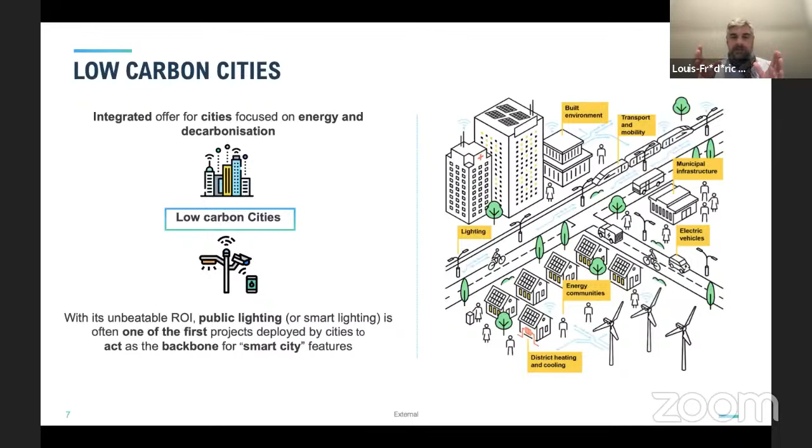But the most important thing is you need to know where you want to go and be ensured that the infrastructure you will mobilize, renew, or develop will be able to handle various services to be offered.

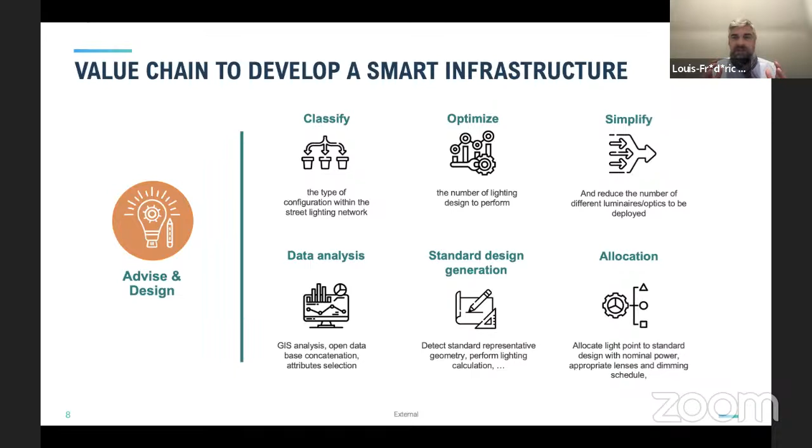To do so, we believe it's important to advise and design, meaning you need to classify, optimize, simulate the impact, simplify, and really take advantage of the data on the ground. We are very active in that area in the regions, about data analysis, making standard design and generation in order to industrialize, scale up, and allocate.

Then using digitalized solutions to build an effective procurement process, mainly under the PPP framework. Definitely, this is the most advanced one, and this is the one that offers the most transparency for municipalities and capabilities. You need to contract properly.

You also have to combine what I mentioned earlier in the discussions: the supply of energy, how to generate on-site generation, how to generate renewable energy on your territory, and embedded flexibility. Flexibility, energy storage, electric or thermal, is definitely key in the future.

The third point is how you engage with your stakeholders, because a municipality is a bundle of various layers of population, citizens, administration. So you need to engage your stakeholders, build environmental plans, and then operate and do the things. You have to monitor the performance with KPIs, digitalize your solutions, and be able to develop new services all the time.

And to be able to do so, you need to have thought before, one step earlier, about this smart and mutualized infrastructure. This is key.

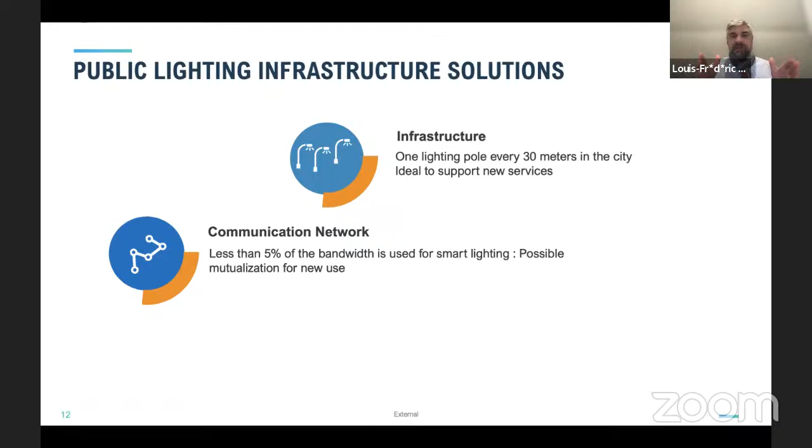And think also that we will have a centralized management system. So rather than having people patrolling everywhere, the system will be smart and will send alerts, and we will just have to respond in a reactive manner if there is a default on the system. This is far more efficient than the previous way we were operating the infrastructure, definitely.

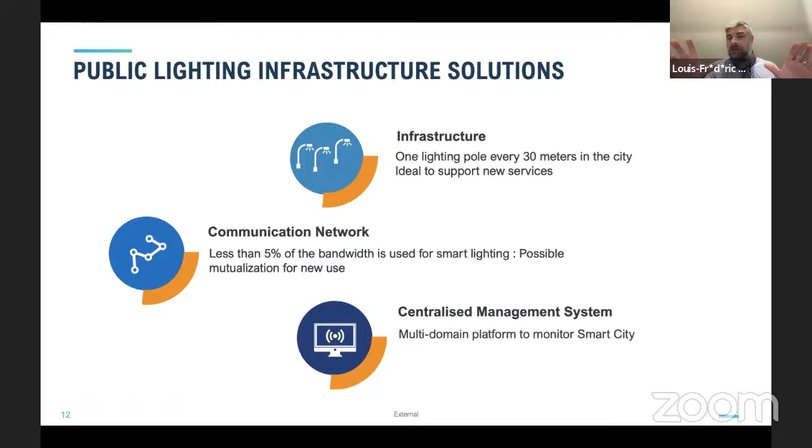With this centralized management system, you will also have the opportunity to overlay many activities on the infrastructure. This is the kind of ideas you can develop on one infrastructure: it could be mobility, security, communications, well-being with air quality sensors, temperature sensors, dust sensors, and of course offering a very good and efficient lighting offer.

If you want to go a bit further, remember we thought it was good to have a renewable power supply, having smart infrastructures in the middle of that. Then you can accelerate the pace to go towards zero carbon cities. You can go a step further and have the appropriate bundle to go in every direction needed to accomplish the vision.

This is definitely where I want to showcase this public-private partnership approach to really boost the energy transition, because what is key now for municipalities is to benefit from expertise, finance, and a long-term perspective. This is where the public-private mechanism is a real good opportunity, because of the capex intensity.

If you want to invest in lighting, energy efficiency, solar panels on buildings, district cooling, mobility, EV chargers, or public transportation - whatever solutions are appropriate to your territory and your municipality's specific needs - you will have to invest a lot of money, and you have to stay on a long-term basis.

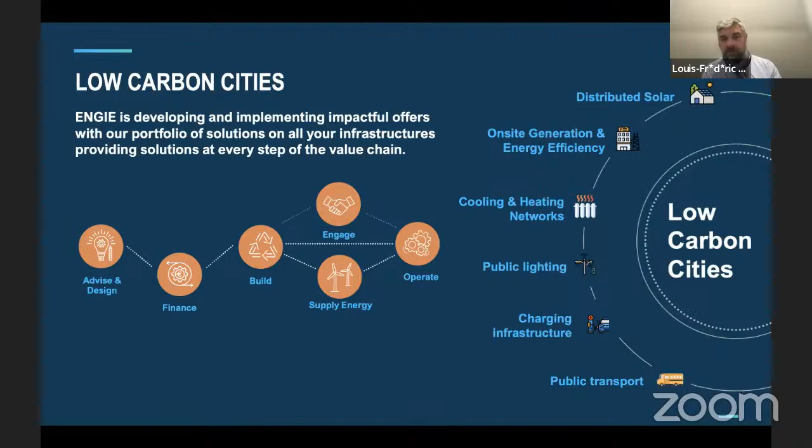We operate at ENGIE in all this area, from public transportation, charging infrastructure, public lighting, cooling or heating networks. We are the first cooling operator worldwide, especially with Tabreed, on-site generation and energy efficiency, and distributed solar. You can see that we are present all along the value chain. We can accompany our customers all along the value chain because we are ready to sustain and take the commitment on performance.

Here's some case studies. Milpitas in the United States - this is a 10-year smart city program for energy and water savings. Within that contract, we have installed 200 kilowatt solar PV, quite small, 5,000 smart meters for water and leak detection, 6,000 street lights, and we have invested money - 1.5 million dollars are saved for the municipality. On the lifetime saving, this is 50 million in energy savings and operation and maintenance savings. So this is quite huge for a municipality.

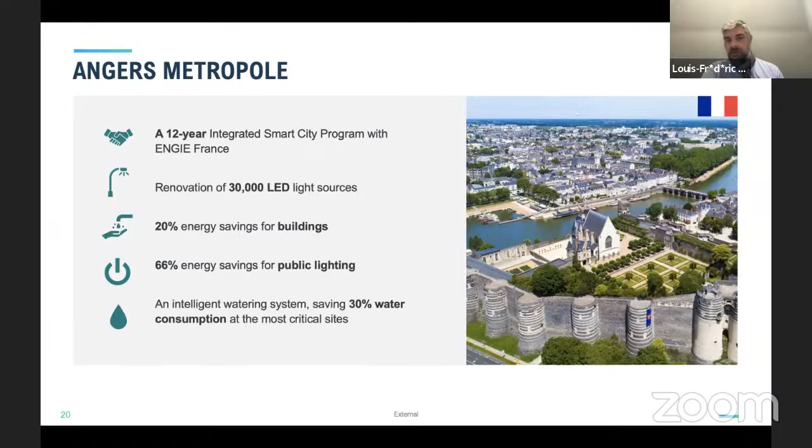Angers Métropole in France - this is the second smart city contract in France, the biggest one. It's a 12-year contract where we will develop smart lighting, smart savings in buildings, smart water systems, and energy efficiency in all the public buildings. So this is really, really key. They also have safety integrations, and on top of that there will be a digital twin and a digital hypervision solution that will benefit the municipality's team to really oversee all the activities in the municipality.

Santa Barbara Unified School District - this is a 10-year contract with solar. We have embedded energy storage. We have also embedded a 28-year PPA, the power purchase agreement, with performance guaranteed. So we see that we can take that commitment.

If we can finish in one minute - yes, I'm finished. I have plenty of examples just to showcase how we bundled various solutions depending on what are needed on the territories.

Ohio State University - this is a 50-year contract with solar, with battery storage, with smart meters. We have also embedded lighting, geothermal energy, and biomass.

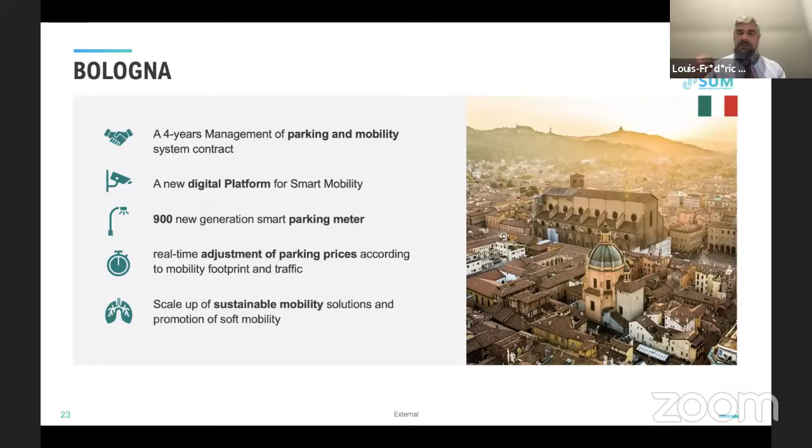In Bologna, this is about parking and mobility contract. So we are able to manage the price of the parking slots to adjust in real time how many people we want to come into the pure town center. In Niteroi, it's about safety and so on.

So thank you for your attention. What I want to resume in a nutshell is that you need to think about how to mobilize at maximum your renewable potential, think about smart infrastructures in the middle, mutualize on them, develop new services, and finally find under the PPP model the most appropriate bundle of solutions you need to deploy on your territory to go to a sustainable city. Thank you.

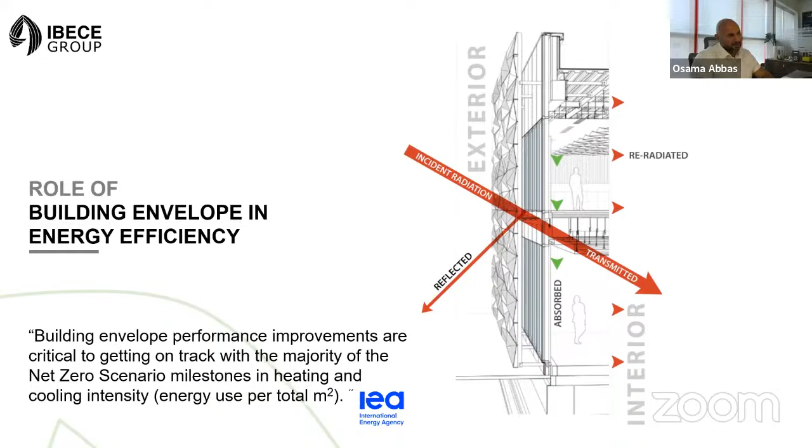Here we're going to talk more about the building envelope. It's envisaged as a kind of glass skin or pot in which people live, separating the outside from the inside. That's the function of the facade, the building envelope: to provide thermal comfort, to provide a good environment for people to live in, to feel warm when needed, to feel cool when needed, and not to be affected by the external weather elements surrounding the building.

It has the function of shielding tenants from the sun, allowing enough daylight, and preventing wind and dust particles and pollutants from entering the building, as well as addressing the rain aspect so there's no water infiltration. Some other aspects relate to acoustics and the safety of the tenants.

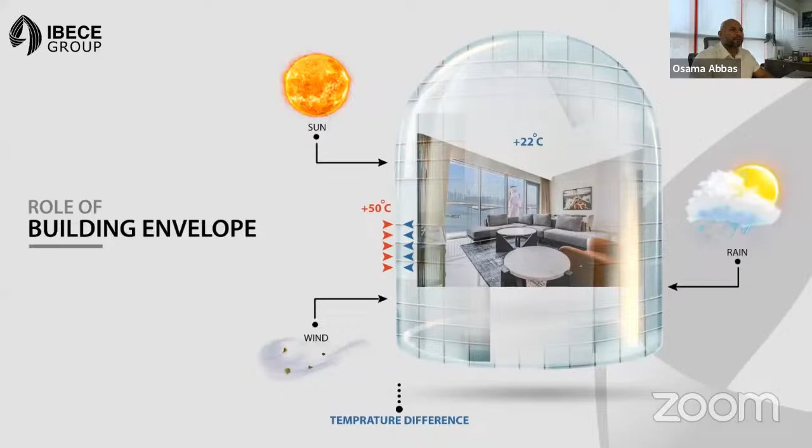Also, according to the International Energy Agency, there's a big shift towards removing old stock types of facades and using new types of facades. As an example, throughout the years there is a trend to use more energy efficient kinds of materials in the facade.

The building envelope, according to the IEA, is expected to save almost 6 exajoules in 2050 under the 2 degrees Celsius scenario. If we're able to reduce 2 degrees of our cooling loads, we're able to reduce 6 exajoules in 2050, a number basically equivalent to the current energy consumption of the UK in total.

You can see from the scenarios that inefficient facades formed of single pane windows, no insulation, and high air leakage are quickly being replaced by highly efficient elements, for example low-E glazed windows, high levels of insulation, and low air leakage, coming into very advanced buildings with zero energy requirements. We call these passive facades, which help a lot in achieving the net zero requirement.

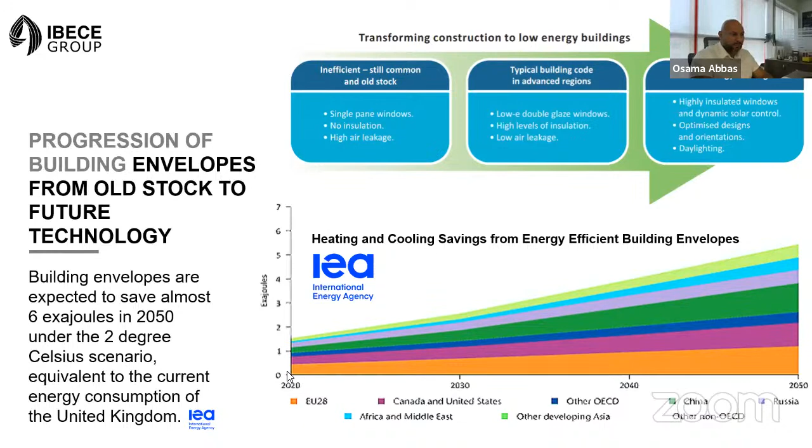Here you can see in this graph how these graphs are growing. The amount of energy in exajoules being saved throughout the year is planned to be much higher than, for example, 2050 has a much higher requirement than 2020 in terms of energy savings through the facade.

This is also an interesting slide. Here we talk about retrofit, because while we can always talk about new buildings and how we design them to be energy efficient, the fact is a new building 20 years down the line is also an old building, let alone the old buildings that we have now. There must be a way to understand how much energy savings we can make by actually retrofitting facades in existing buildings.

This is a simple scenario when we're taking a baseline scenario of inefficient facades, where we are consuming around 650,000 kilowatt hours per year of energy. Then we do 3 levels of retrofit. Retrofit level 1 is the basic retrofit, where it is not invasive. Then we go into a medium type of retrofit, then into a deeper retrofit.

As you can see here, ladies and gentlemen, the values differ a lot. The building used to consume 653,985 HVAC electric consumption. From 650K, we go down to 570K, then 510K, ending up with 450K. So that's around 31% decrease in the amount of cooling load from our HVAC system.

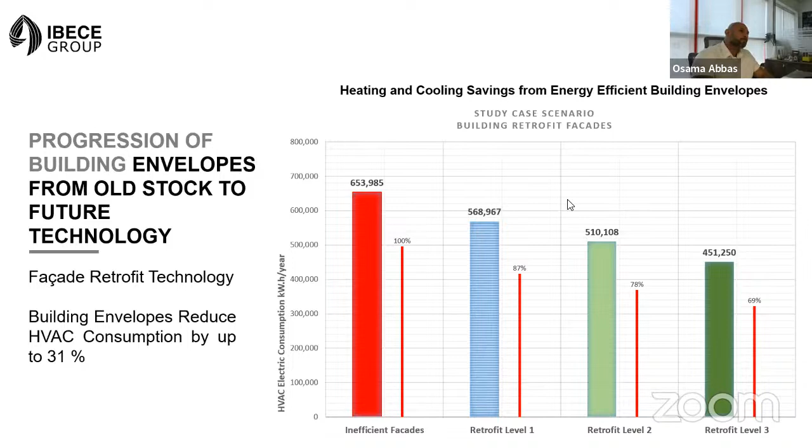Next slide, we're going to talk about what we as IBECE Group are doing to help, to support. We are using our expertise as facade engineers to create a system in which we are able to read the pulse of the facade. So this is the pulse - it's like when people go to doctors and they take their pulse, heart rate and blood pressure. It's the same thing here with facades.

What we basically do is we have something called FESPA that we've created, short for Facade Energy Saving Potential Assessment. FESPA is a very detailed way of scanning the building and understanding whether the facade is a source of energy leak or not. Accordingly, we are able to determine how much energy is lost, and in which manner - radiation, convection, conduction, or else. Then we can propose alternatives, and these alternatives can easily be linked to simple payback schemes, so that CFOs can know how much they will have to invest and how much will be returned by the building in terms of savings.

This seminar goes under a big title, which is Smart Cities. That's why we here at IBECE decided to talk about smart facades as well, not only about energy savings, but smart facades, which also entail some savings.

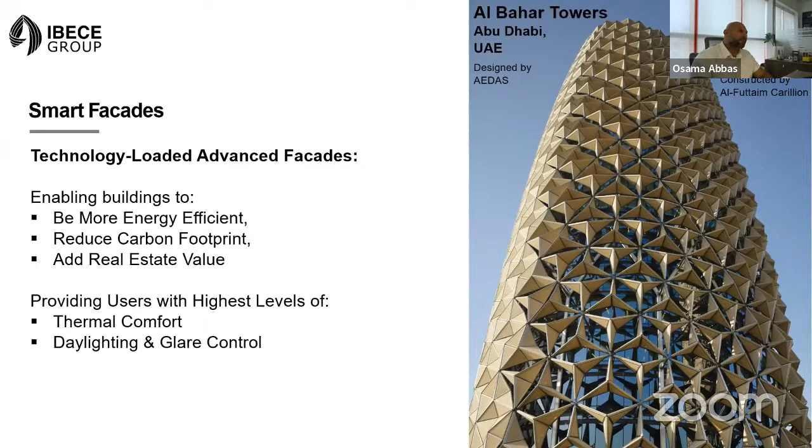This is also another example of dynamic facades, where we have shades on the face of the building. They basically move up and down based on the requirement of the building tenants, connected to a central control unit. They are active and develop automated responses to environmental changes, and they can change shape, color, and texture. There are four different types of dynamic facades: mechanical, thermal, solar, and electrical, with mechanical being one of the most cost-effective, as seen in the Al Bahar project.

The thermal and solar types relate to gas infills inside the cavities of glass, where they react to the sun with electric impulses to change the opacity of the glass, which is on the higher end of the spectrum in terms of cost efficiency.

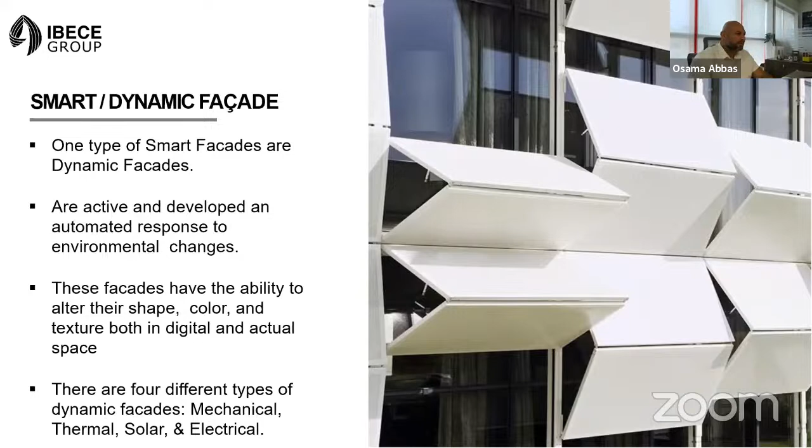Malak, I'm not sure if I exceeded my time or not. No, you are on time. Thank you so much, I'm on time. Yeah, I think 14 minutes. If there are any questions, I can answer. We will be asking several questions for such an amazing and important topic in the Q&A session. Thank you so much for mentioning the importance of energy efficiency and such innovative solutions for enhancing building efficiency, and its importance as part of smart cities. Inshallah, we will meet again in the Q&A session. Thank you so much. With all the pleasure.

And now I would like to warmly welcome the Secretary General of the Arab Towns, Engineer Abdulrahman Al-Asfour.

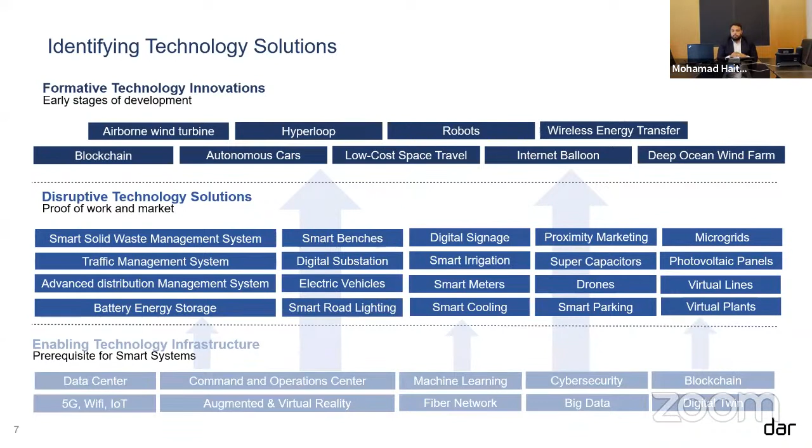And then we have the formative technology innovations, which are technologies under development where we need to consider readiness, or some design factors within our current solutions, in order for them to be implemented in the future, such as internet balloons, robots, hyperloop technology for transportation, and wireless energy transmission.

So after we have presented what is a smart city, now we will present what is energy transition. Energy transition is the shift from fossil fuel-based technologies to renewable and green gas systems in response to climate change.

As you all know, climate change is resulting from the increase of greenhouse gases, and it is shown in the form of heat waves, forest fires, increased intensity of tropical storms, and also the melting of the poles. It has also a projected economic cost, which is extremely high. Therefore, in response to climate change, energy transition procedures shall be taken into consideration.

It all started in the 1990s with the United Nations Framework Convention, which was the first, I'd say, unofficial agreement to initiate action for climate change. Then we have the Kyoto Protocol in 1997, which was the first agreement mainly concerned with the developed economies related to action regarding climate change.

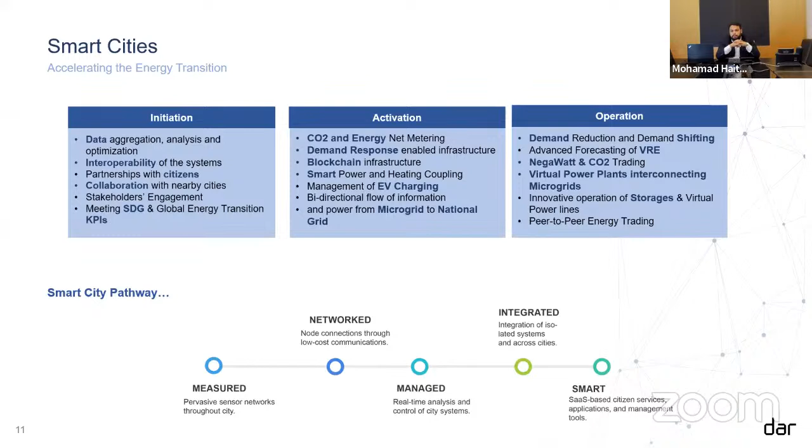Here we'll take an example of a smart grid. A smart grid is mainly composed of the following systems: advanced metering infrastructure, distributed energy resources, energy storage, microgrids, digital substations, energy management systems, EV charging, and smart road lighting, with bidirectional flow of power and information between supply and demand.

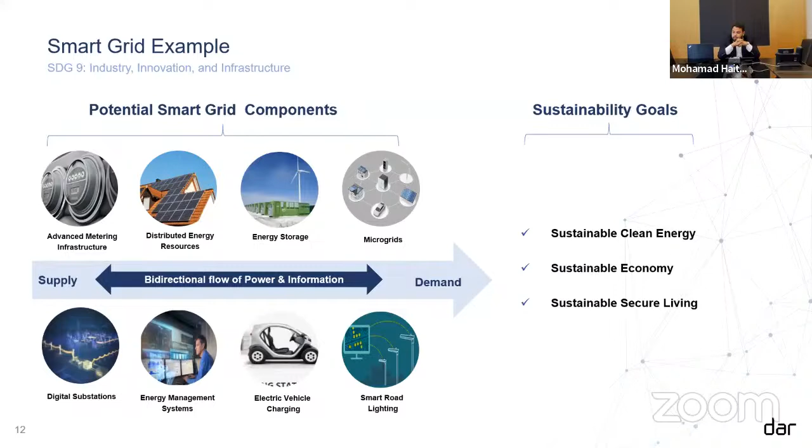All of this to ensure sustainable clean energy, sustainable economy, and sustainable secure living.

So the smart grid has a circular architecture, interconnection between generation resources from the national grid down to microgrids, with a citizen-centric approach, making the citizen the center of the equation.

So he is now a consumer and a producer at the same time. He consumes energy from the grid, and he produces energy, let's say, from his rooftop photovoltaic or from vehicle-to-grid application, or he can sell back energy to the grid through storage.

So the smart grid has several functionalities, such as fault current limiting, power flow control, adaptive protection, automated voltage control, and real-time load measurement, etc. So it has this automated self-healing applications and instrumentation and control solutions and applications.

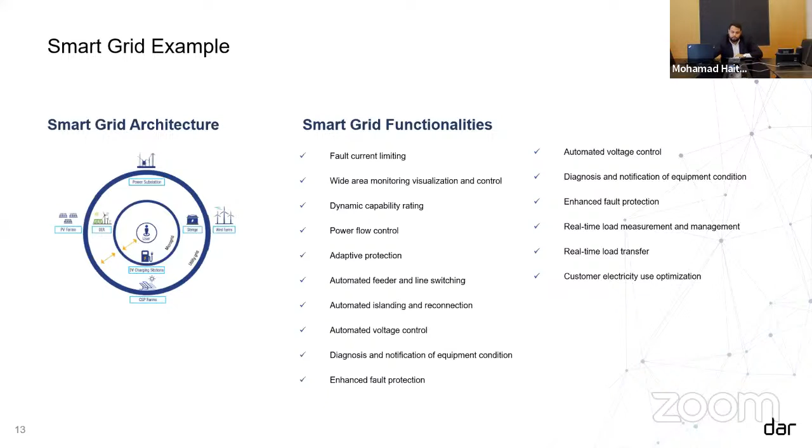One of the characteristics of the smart grid is that it is unbundled. So in order to activate the smart grid application, we need to ensure that the value chain within the smart grid is unbundled. Generators are separate from T&D providers, which are separate from DSOs, separate from traders, and separate from retailers. At the end, we have the prosumers, which used to be consumers. Now, after producing electricity from their facilities and selling back to the grid, they become prosumers. This unbundling shall ensure competitiveness within the services provided at the grid level.

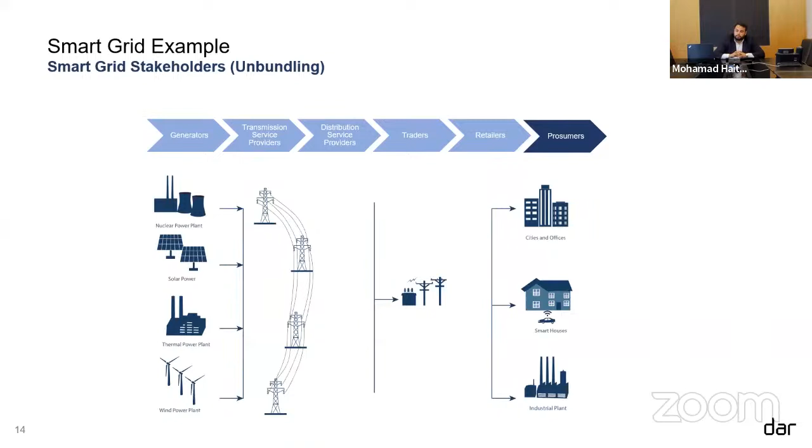Now let's take some insights and innovative applications that can be done within smart cities, mainly within the energy systems related to smart cities. One of these applications is the negawatt. So what is the negawatt? It's a theoretical unit that reflects the amount of power or energy saved or conserved as the result of technology upgrading, structural changes, or mitigation initiatives.

In other words, negawatt is a unit concerned with energy efficiency. So whenever I reduce my energy consumption, this is the negawatt. Studies show that investing in the negawatt is 40% less than investing in the megawatt. So for us to increase the capacity will cost us a certain capex. It will be cheaper to invest in reducing this installed capacity.

If we can finish in 1 minute, please.

Yeah, sure. So in order to apply this innovative application of a negawatt, we need to implement certain infrastructure, from metering infrastructure to ICT to blockchain layer, also to enable the trading, so people can reduce their consumption and get this unit in form of a token and resell it back on the grid.

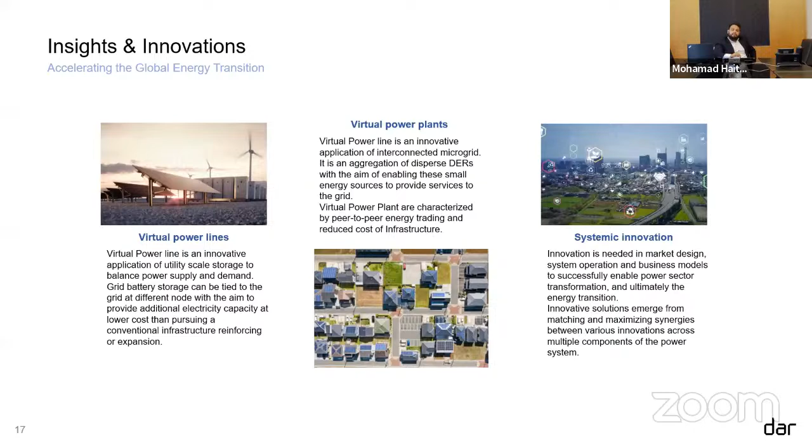So just to wrap it up in one sentence: Smart cities shall accelerate the energy transition by endorsing energy efficiency and renewable energy generation, and by limiting the impact of electrification on existing infrastructures. That's it. Thank you.

Thank you, presentation is really important. Thank you for explaining the smart cities and explaining in details. It's important. Thank you so much.

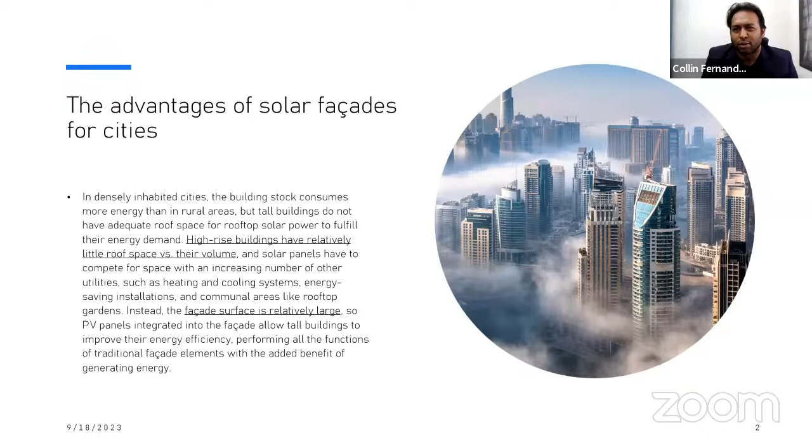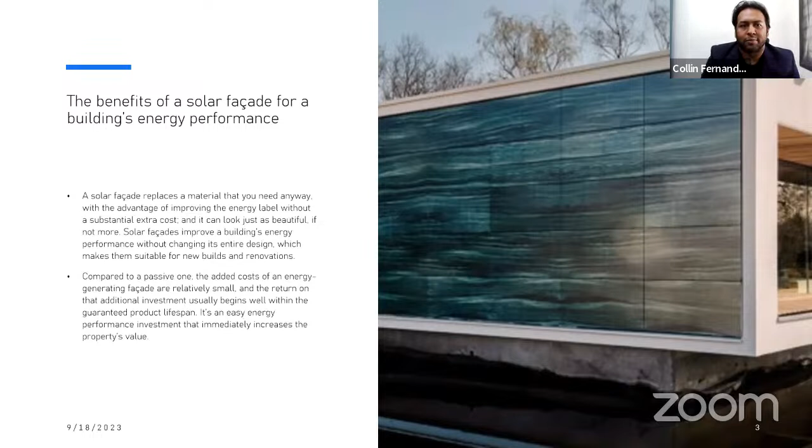The benefit of solar facade is we can generate electricity from the sun, reduce 40% HVAC cooling load, reduce 20% of lighting load, achieve daylight lighting, and reduce peak demand. Let me tell you a little more about how we reduce the peak demand.

Usually in office buildings, the peak demand rises at 9 o'clock and again at 3 o'clock - that's when the sun rises and the heat comes down to the building, making it really warm. To cool that off, we need a really high amount of HVAC load, which is cut if there is a solar module that generates electricity but at the same time blocks the heat from entering the building, reducing peak energy demand.

This also helps in reduction of grid congestion, and finally there is a reduction in operational cost, and it's aesthetically integrated. Like I said previously, there are no problems with the aesthetic design.

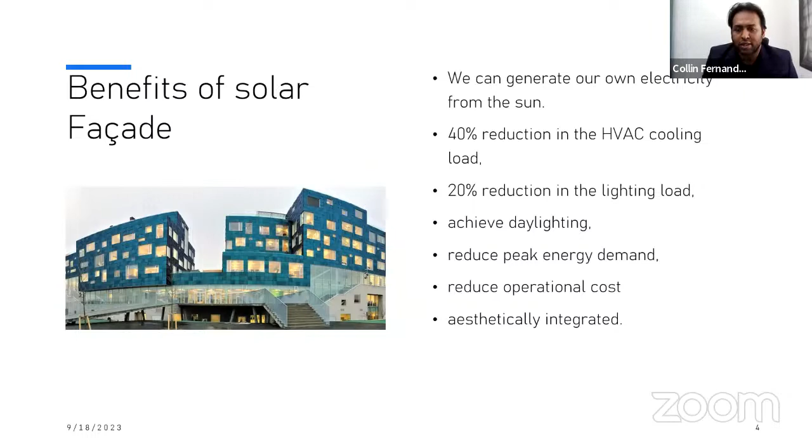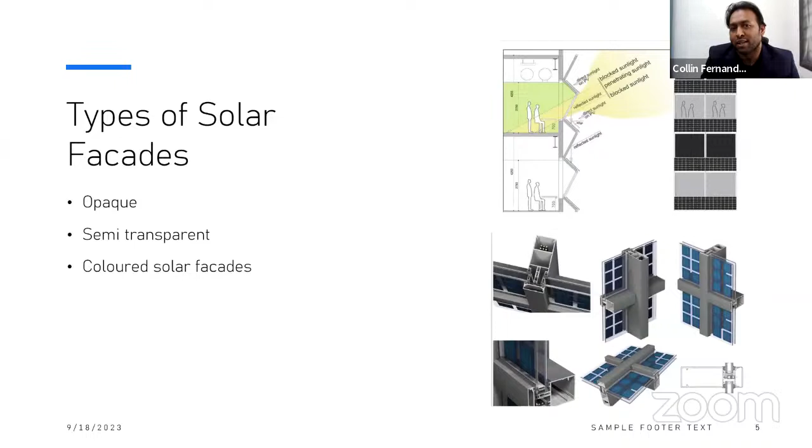The types of solar facades are basically opaque, where you cannot see anything from inside, but there are also models where we design solar modules completely oriented towards the sun, with glass oriented towards the street. So you have an uninterrupted view but still get daylight while blocking the heat and sunlight. It can be integrated on any facade construction material, so it doesn't need a special fixation system - it can be integrated with the regular fixation system.

I'm sure a lot of people understand how the solar system works, but in a facade, it's a little more complex. We have dedicated software to analyze these factors and put in place a really nice design, which will give us the best yield.

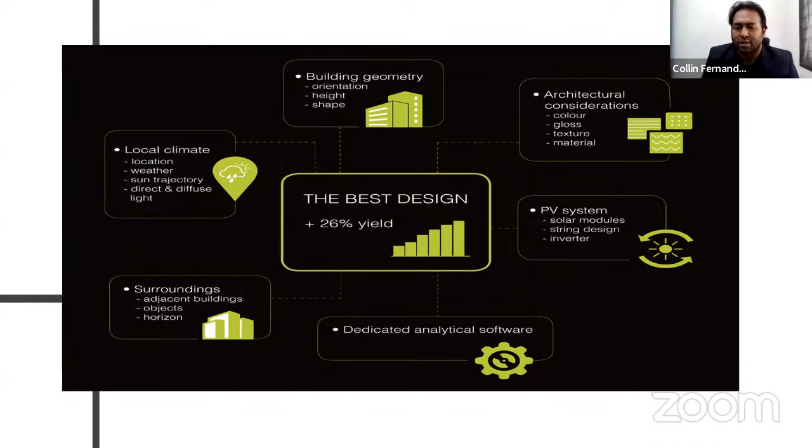And of course, I'll talk about the finance next. Finance is key in this part, when we talk about BIPV, which is Building Integrated Photovoltaics.

Anyhow, if you're looking at a new building or you're going to replace an existing facade, we're going to incur a cost that over time will repay. It would be nice if it repays us. So when we put in BIPV systems, it's about 40–50% higher cost than the regular facade.

But if we can add a nice financial scheme where they don't pay that extra cost upfront, but rather recover that cost over a period of 5 or 10 years and then repay it, it will work. It would be really beneficial for the client. So that's what we are trying to do.

Finance really plays a key role when it comes to planning a building. Let's say we take HVAC capital investment, lighting capital investment.

So all of this, when we say we're going to wrap the building with a BIPV solution, there is going to be a significant difference in the capex. It will increase the capex by a marginal amount, but which can be recovered over a period of time. So these are the key factors we can really look at for the solar facade.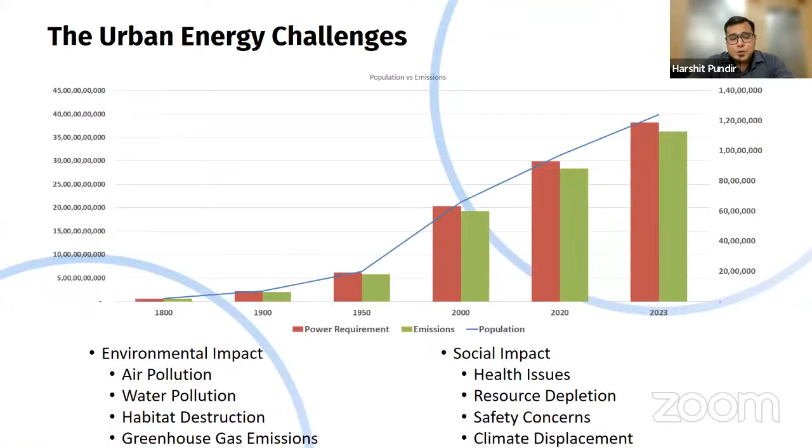Moving on to the next one: benefits of renewable energy. As we all know, renewable energy is a clean resource of energy.

Sustainability: let's talk about resource availability. Unlike fossil fuels and nuclear, which are somewhat finite sources of energy and depleting at a faster rate, renewable energy like sunlight, wind, water, and geothermal heat are examples that are not going to run out over a human time scale.

Next is environmental impact. Harnessing renewable energy has minimal impact on the environment compared to fossil fuels. It reduces habitat destruction, and pollution of air and water is reduced. There are also no chances of catastrophic damage due to accidents like that.

Reduced emission: greenhouse gas emissions get reduced because of using renewable energy sources, which in turn improves air quality and mitigates climate change. Since emissions of greenhouse gases will be lower, we might be able to mitigate global warming, as outlined in the Paris Agreement, which aims at limiting global warming to well below 2 degrees Celsius above pre-industrial levels.

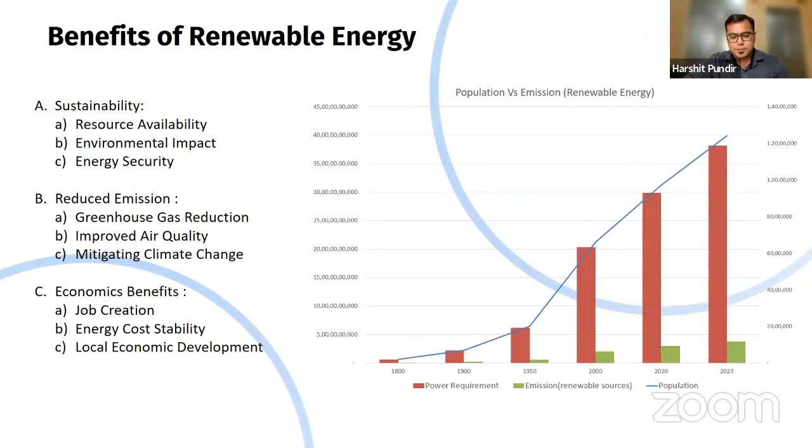So there are some renewable energy technologies which are available in the world, in the market. As of now, one of the first is solar energy. We are utilizing solar energy for generating electricity or heating water and everything, which is significantly reducing the power requirement from fossil fuels.

Talking in terms of smart cities, solar energy is one of the best renewable energy sources which can be used at urban scale, because they are highly suitable for urban areas due to versatility in installation. They can be placed on rooftops, integrated into building facades, or even incorporated into urban infrastructure like bus stops or street lights. Since solar energy is a decentralized energy source, it makes an excellent choice for smart cities aiming to reduce their carbon footprint.

Then we come to wind energy. Wind energy is likely used on a larger scale, so there are offshore wind farms and onshore wind farms that can be installed on the outskirts of the smart cities. Also, nowadays with technological advancements, smaller wind turbine designs for buildings are available, and careful planning is essential to mitigate noise and aesthetic concerns. But it can be used on high-rise buildings to generate electricity and reduce consumption from fossil fuels.

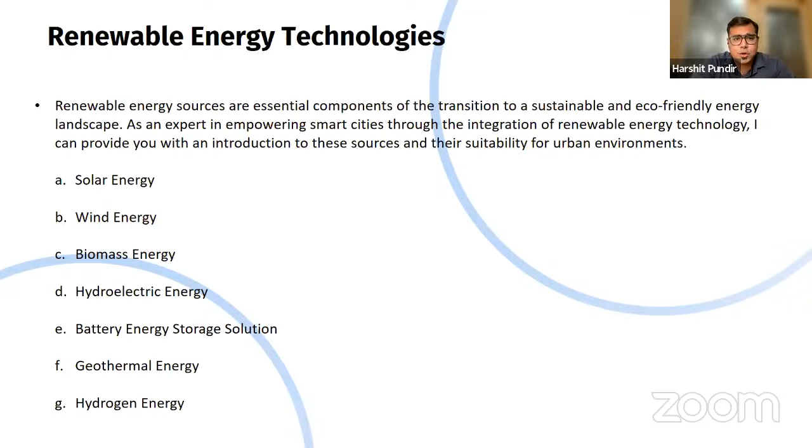In the context of smart cities, the integration of these renewable energy sources requires careful planning, technology adoption, and a focus on energy efficiency. Smart grids and energy storage solutions can play a crucial role, allowing us to utilize stored energy when the primary source is not providing enough electricity.

Then, innovations and emerging trends: emerging technologies for energy optimization are at the forefront of efforts to create smarter and more sustainable cities. Some examples given here are energy storage systems.

Energy storage systems can be connected to wind farms, solar energy, or hydroelectric energy, which will store the surplus energy and provide it during peak hours when electricity requirement is on the higher side and our renewable energy sources are not producing that much.

Blockchain technology can be implemented. It is a decentralized digital ledger that securely records and verifies transactions across a network of computers. In the context of smart cities, blockchain can enable peer-to-peer energy trading among city residents and businesses. This technology allows transparent and efficient energy transactions, reducing the need for intermediaries and potentially lowering energy costs for consumers.

Advanced grid management systems, using sensors, real-time data analytics, and control mechanisms, can be implemented. For example, in the daytime, if power to the industrial or commercial side is required on the higher side than the residential one, it can efficiently transfer energy to the required areas and lower the energy requirement on that side. Vice versa, in the evening time, since residential complexes require a higher amount of energy, it can transfer to that, managing supply and demand efficiently.

After implementing these renewable energy technologies and other policy-based decisions, they have achieved measurable outcomes. In terms of energy saving, they are contributing around 4% of the city's electricity demand to renewable energy sources. They have also reduced their carbon emissions and set ambitious climate goals, aiming to become carbon neutral by 2025.

Becoming carbon neutral by 2025 will eventually be beneficial in terms of health, as it reduces the emission of harmful gases. Air quality improvement has been seen in Copenhagen, since reduced emissions from fossil fuels have resulted in improved air quality and public health, enhancing the overall quality of life.

Economic growth - as we have seen earlier, renewable energy resources are creating jobs in terms of operation and maintenance. They are increasing jobs and demonstrating that sustainability can be economically advantageous.

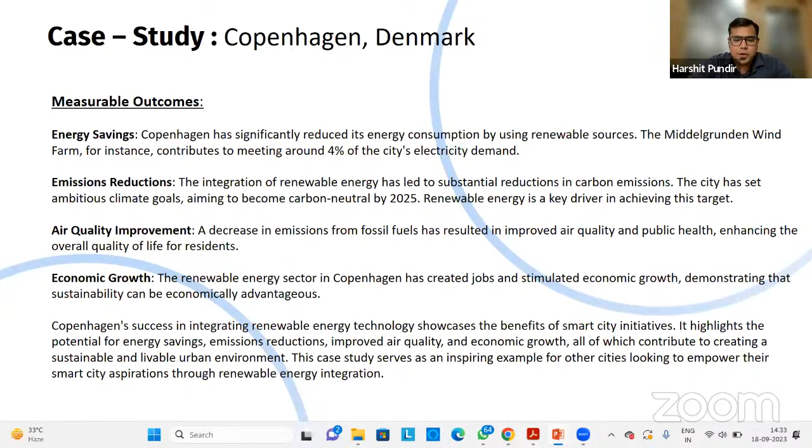Copenhagen's success in integrating renewable energy technologies showcases the benefit of smart city initiatives, and empowering them with renewable energy sources will have a larger impact.

So there are some policies and investments which can be brought into picture when we are discussing smart cities, which can be much more beneficial for the society as a whole. Subsidies and tax incentives can be offered by the government for people who are installing renewable energy sources at their homes and become a prosumer.

Feed-in tariffs exist in most countries and areas. They are provided to prosumers who have small energy generation plants in their homes or industries, which will eventually reduce energy consumption from fossil fuels and increase quality of life.

Renewable portfolio standards and renewable energy targets can be set by the government for industries or residentials to increase the popularity of renewable sources. Non-compliance can be penalized to increase the installations of renewable energy sources.

Net metering and grid integration: net metering policies can be brought into picture where the prosumer can utilize the required amount of energy and the rest can be passed on to the grid, which can be utilized by other consumers.

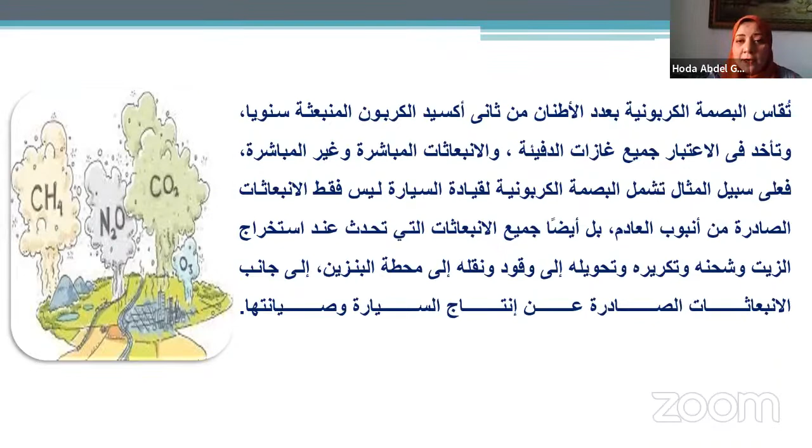أيضا هنا مثال آخر: عندما يقوم الفرد بالسفر، فالبصمة الكربونية من فرد تختلف من فرد لآخر. هل سيسافر على درجة رجال أعمال أم درجة سياحية؟ طبعا درجة رجال الأعمال تكون المساحة المخصصة للفرد أكبر من الدرجة السياحية، فبالتالي تكلفة النقل تكون أعلى، وهناك عوامل أخرى تدخل: الارتفاع الذي تحلق فيه الطائرة، وزن الشحن، وأكيد المسافة التي ستقطعها الطائرة. هناك عوامل كثيرة تحدد البصمة الكربونية.

هنا البعد الثاني أو المحور الثاني يتكلم عن مسؤولية الفرد في الحفاظ على استدامة البيئة. إحنا لما نعرف إن السلوك الاستهلاكي للأسر تسبب في نحو 72% من انبعاثات غازات الاحتباس الحراري، معنى كده إن استهلاك الفرد يسهم بشكل كبير في مشكلة الاحتباس الحراري. طبعا قرارات الأفراد كمستهلكين في النهاية هي تحرك سلسلة التعاملات التجارية، وتمتد عبر شبكات التوريد. كل هذا يسهم في زيادة البصمة الكربونية.

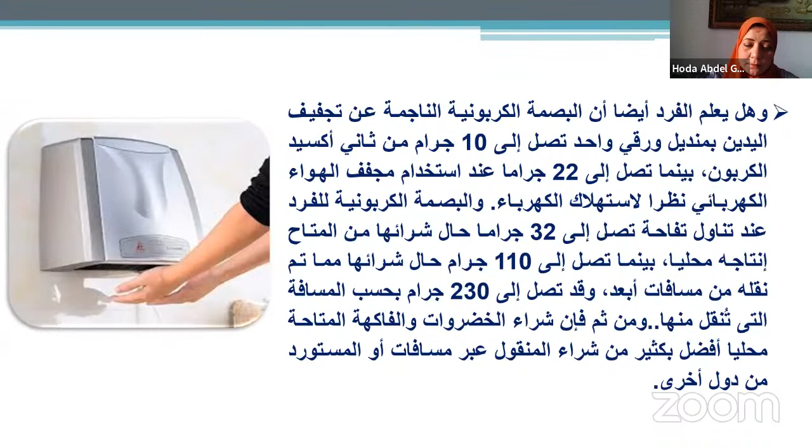طبعا من الأرقام اللي ذكرتها أكيد هيتضح إن قرار الفرد بيؤثر على البيئة بشكل كبير. هنا بعض الأرقام الهامة اللي توصل إليها فريق بحثي بجامعة ليدز البريطانية. الفريق توصل إن لو الفرد استغنى عن التنقل بسيارة سيوفر بصمة كربونية بمعدل 2 طن سنويا. أيضا عندما يستخدم مصادر طاقة متجددة سيوفر 1.6 طن. عندما يلجأ إلى النقل العام سيوفر 0.9 طن، وهكذا سوف يتضح من الرسم التالي.